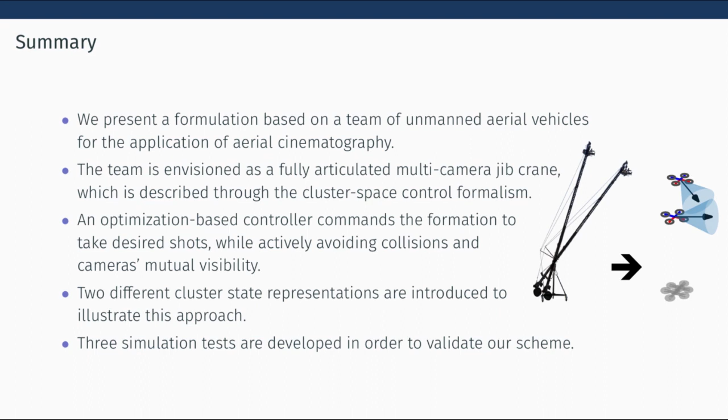Recently, unmanned aerial vehicles have been used for filming in many scenarios, and the applications continue to grow. There is a genuine interest both in the academia and industry, and a lot of effort is being put into autonomous cinematography. UAVs not only can be used to generate the same type of shots that are available with traditional equipment, but they also enable new ones while speeding up filming times and potentially reducing cost compared with helicams and spidercams. It is of special interest to consider applications where not one but a team of UAVs is given such a task.

For this, we think of multiple UAVs as an articulated multi-camera jib crane, which can be remotely controlled by one or more operators. In our setup, the jib crane can follow predefined trajectories given by artistic guidelines, but it can also be commanded to fine-tune what the cinematographer wants to show. While doing so, it should also be able to avoid collisions and mutual visibility of the other cameras.

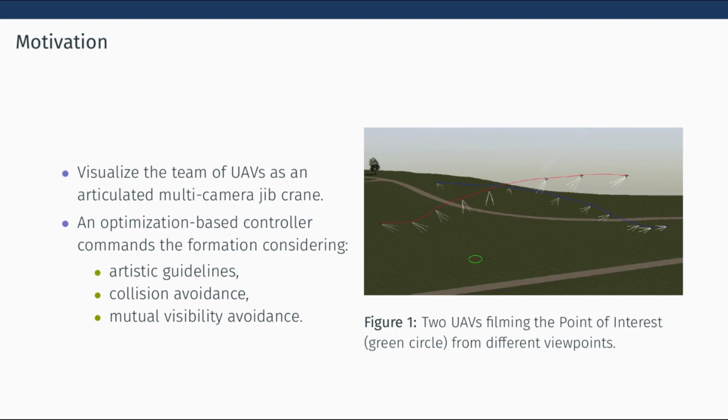The cluster space formulation is a technique that allows simple specification of the motion of a group of robots, and it is versatile in the sense that the state's definitions can be changed depending, for example, on the desired type of shot. This formulation allows to work with application-oriented parameters for both specification and control.

To get an insight on how the cluster space formulation operates, we can think of a simple scenario where a group of three ground vehicles should maintain a triangle formation. This group forms a cluster of robots for which new states are defined. For example, we can use the triangle size and orientation.

The original states of each robot, which are defined in the robot space, relate to the states in the cluster space through the forward and inverse kinematic functions. These functions define the mappings between both configuration spaces. The tangent spaces of these manifolds can be related using the Jacobian matrices of each function. So it is easy to translate velocities in the cluster space to velocities in the robot space and vice versa. This notion is key to build a cluster space kinematic controller.

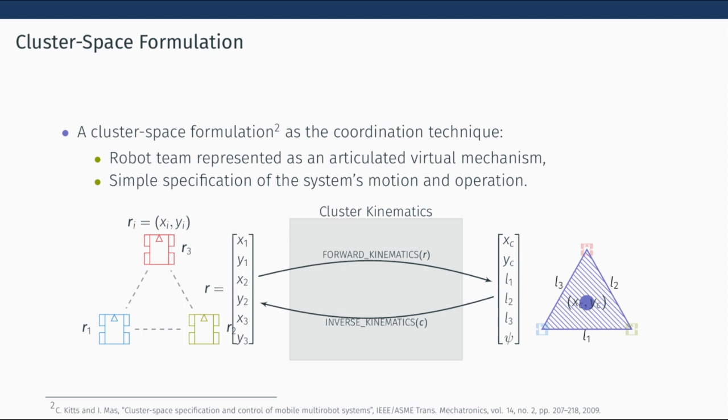To control such a formation, we proposed a closed-loop control strategy using cluster states defined for the application and the desired type of shot. The controller is based on an optimization problem which is solved simultaneously for all the agents in the formation for a finite time horizon with fixed time steps. Assuming stabilized UAVs, vehicles with 4 degrees of freedom, X, Y, and Z axis, and the yaw angle, each with a pan tilt camera, this type of controller is suitable.

To do so, we define 3 different cost functions that account for different aspects of the problem, namely an artistic cost function, an aiming cost function, and a smoothness cost function. Using this, we solve a minimization problem for the weighted sum of each of these functions, subject to constraints defined by the vehicle dynamics, mutual visibility avoidance, collision avoidance, and bounded control inputs.

The artistic cost function penalizes deviation from the intention of the director of photography. These artistic guidelines include predefined trajectories and viewpoints, and velocity commands that are used for online fine-tuning of these trajectories. The aiming cost function weights the error of each agent in aiming at the point of interest.

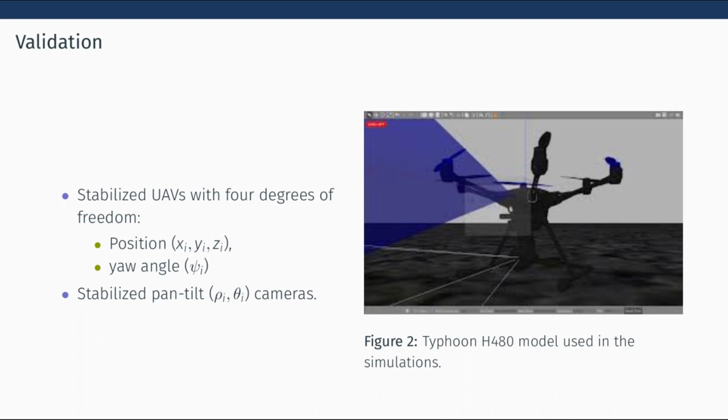The simulation testbed consists of a small quadrotor that acts as a point of interest and a cluster of hexacopters with pan-tilt cameras with a configured field of view of 60 degrees, although it's in reality 120 degrees. The reduced field of view allows us to see on video the behavior of the UAVs as they approach another's field of view. For all these vehicles, the stabilizing controller is the PX4 autopilot, which runs within a ROS Kinetic environment and is simulated using Gazebo 7.

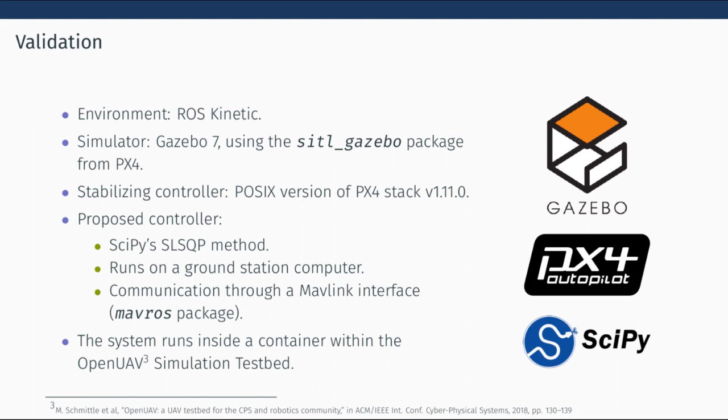The proposed controller was implemented in Python using SciPy's sequential least squares programming method and runs on a ground station computer which communicates with the vehicles using a MAVLink interface provided by the MAVROS package. The system runs inside a container within the OpenUAV simulation testbed of Arizona State University in the United States.

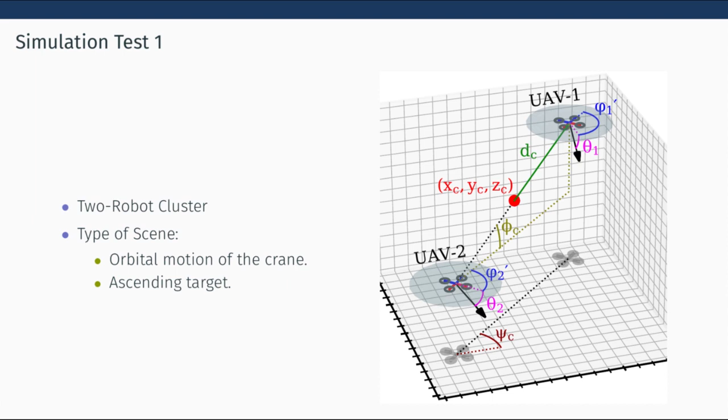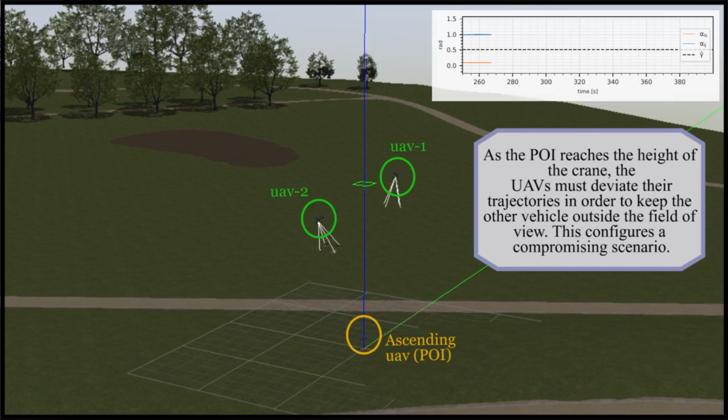The first video shows a cluster of 2 UAVs doing an orbital motion at a fixed altitude aiming at an ascending UAV, which is our point of interest, and their respective first-person view shots. This scenario stresses the system as the point of interest reaches the same altitude as the cluster because the aiming function will try to center the point of interest in the image, a situation that would violate the MVA constraint, so the controller must perform a great deviation from the artistic trajectory.

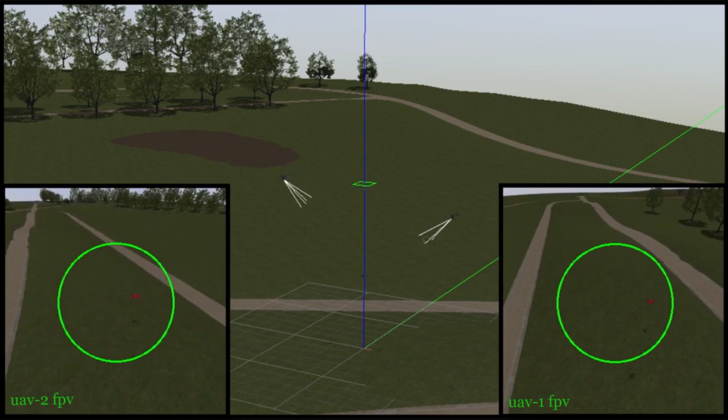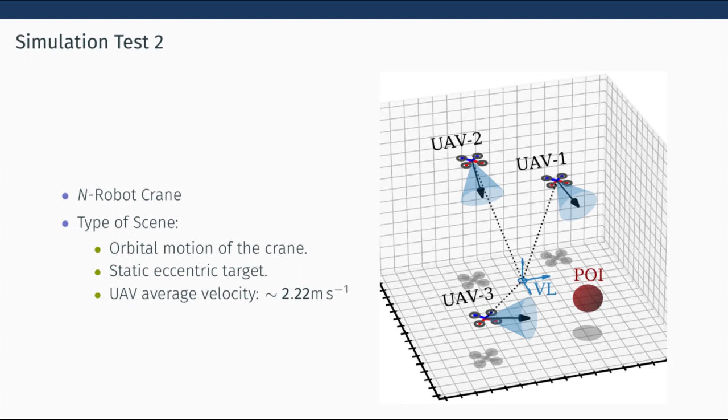The second and third tests are similar between them. Both videos present the results in a similar fashion as the first video, considering now a formation of 4 UAVs and a static point. The formation has to do another orbital motion, but in this case, the point of interest is further away and not at the center of the formation.

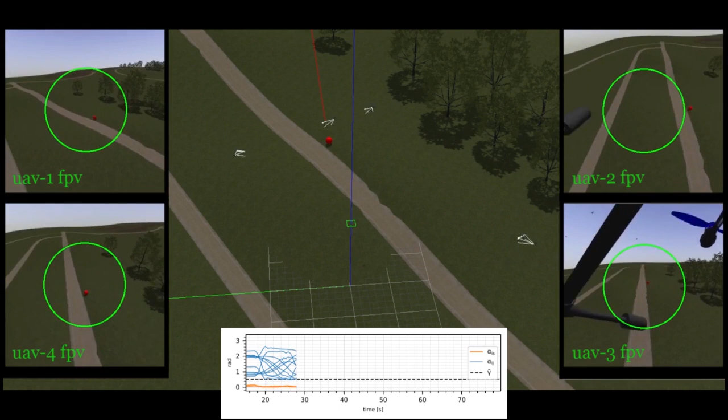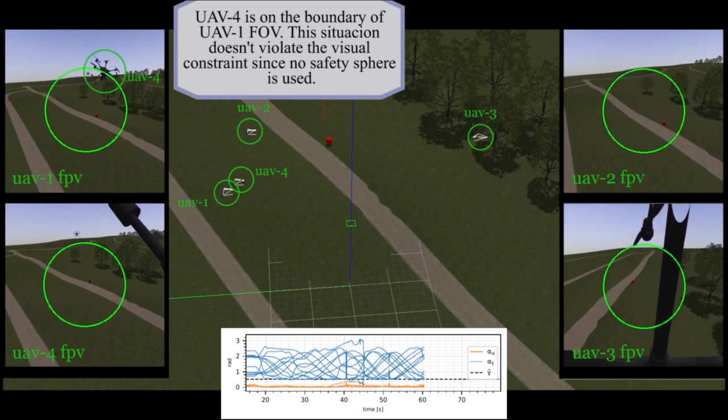It can be seen that the controller moved UAV 4 out of its predefined trajectory. The FPV shots show how the UAVs maneuver to evade the field of view of the other cameras, even at high speed. However, it must be pointed out that for the higher speed, there are intervals where the MVA constraint does not hold, and this is due to the lack of a safety radius to contemplate position uncertainties and because of the fixed time steps used in the optimization horizon. For these time steps, the constraint holds, but does not hold between these time steps.